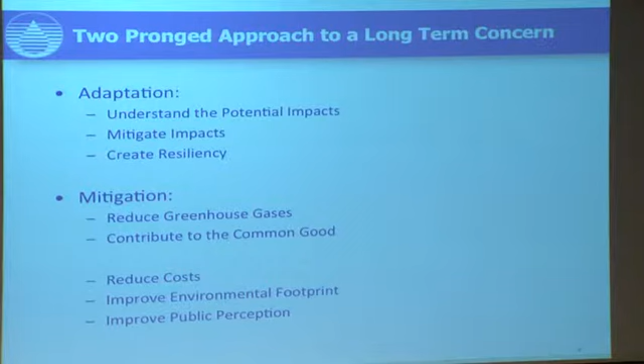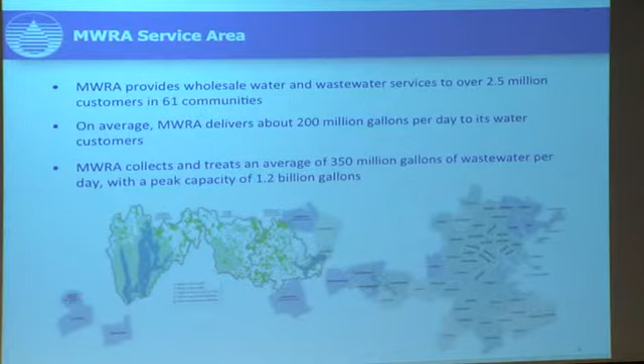We are the regional wholesaler. We provide water and sewer services to 61 cities in the Boston region, about 200 million gallons per day of drinking water supply. Before I proceed, I'll mention that in 1980 we used 340 million gallons a day, and some of the lessons we're trying to apply now to climate change and our efficiency of energy use come out of our success at reducing water use down to substantially below our reliable yield. On the wastewater side, we have one of the largest wastewater plants in the country, processing up to 1.2 billion gallons per day on a rainy day, perhaps like this morning, when our flows jumped up quite substantially while I was getting out of bed.

You always need to know what your mission is in order to know where you're proceeding, what you're doing. You can use a lot of words, or you can boil it down: drink with confidence - I think John Sullivan kind of framed that earlier - and flush with pride. If we're going to have a clean harbor, we want people to realize they're connected to that harbor. Those are both nice three-word slogans. Being an agency that's spent about $7 billion in the last 28 years, I like to add 'all accomplished affordably,' in order for us to retain our independence and ability to do these good things. Our customers need to be comfortable that they can afford our services. As we think about climate change, our customers expect to be able to drink with confidence and flush with pride under all circumstances. It's not just a good sunny day situation.

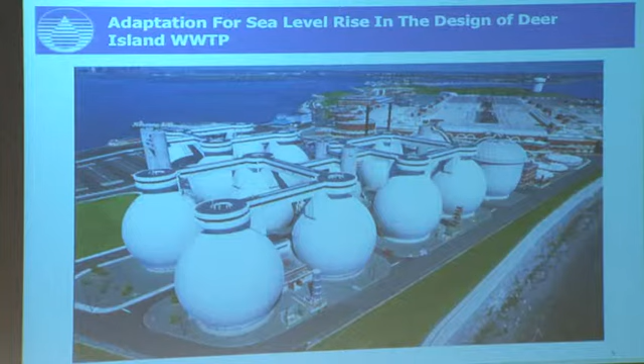So let me start with Deer Island. Deer Island's the largest plant, one of the largest plants in the country, and it's one of the few places where we've actually done anything nationwide concrete. When this plant was being designed in the late 1980s, the engineers, in almost a guerrilla action, looked at sea level rise. They looked out 50 years from 1989 with the best available science and added to Deer Island an assumption that sea level could rise almost 2 feet. Might not be what we would pick today, but it was a pretty good number back then.

And they did a bunch of things. Physically, the island is armored to assume storm surge and that sea level rise. The island assumes that the grid will go down, that our partners, as New York experienced, in electrical generation will lose their ability to deliver power to us. We can be freestanding for an extended period. Our principal headworks supplying the south of the system is also similarly armored. So the facility itself is adapted to climate change.

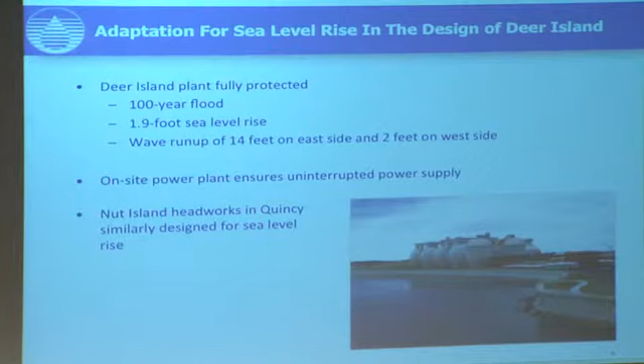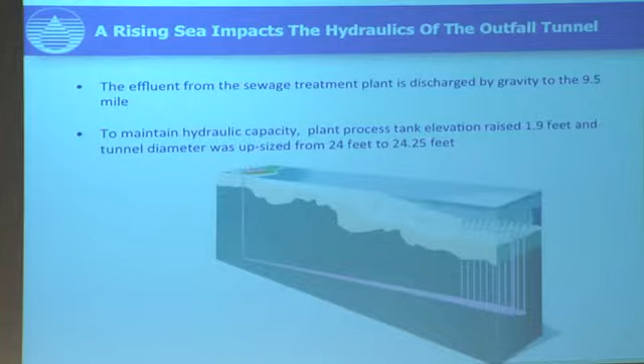More interestingly, and more importantly, and really where they got started on it, is that hydraulically we have the capacity going forward. If you think about how almost anything in the water and sewer industry works, it's elevation differences. The plant's here, sea level's here - the difference between those two things is what allows us to take the wastewater from the plant and move it 9 miles out the outfall to discharge way into Mass Bay. If sea level rises, the capacity of the outfall gets smaller.

If the capacity of the outfall is smaller, the capacity of the plant is smaller, and it rains, we're discharging untreated wastewater closer to where people live. That's not our mission. Our mission is to take it away, treat it, and put it out in the harbor. So the plant was raised hydraulically, almost 2 feet, and the outfall was built slightly larger. So the plant, the biggest single piece of our infrastructure, was adapted to climate change before it was even constructed. That's great.

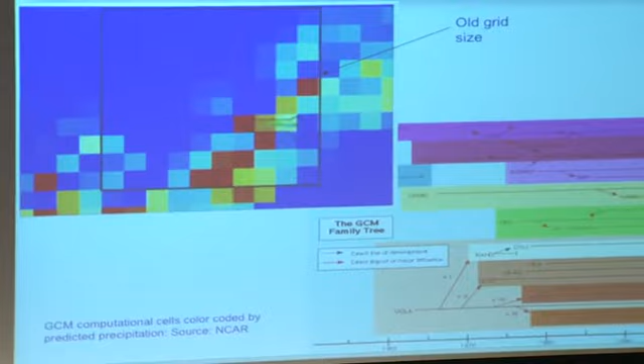Physical, something done. What else have we looked at? We've been thinking about this for almost that amount of time in the rest of the system, and I like to show this because it shows how long we've been at it and how the science has changed. When I first started looking at climate change for the water system in the early 1990s, I could get a single precipitation data point and a single temperature data point per year for that grid cell.

Now, there's Massachusetts. This is the Canadian Maritimes. I think Washington, D.C. is down here somewhere. We know that those places are not alike. Now we can get data broken down into many smaller grid cells, and in fact out by Worcester, where our reservoirs are and where it rains and snows differently, it has a different value than here in Boston. So we're able to do that.

We're also able to look at multiple models and get some sort of statistical view of how the weather might change in the future. So now we have weekly data at that kind of scale and are able to use that. So what does it give us?

So John Sullivan mentioned that we've got gravity to move the wastewater in the metropolitan area. I'm here to say that not only will gravity move it, but as climate changes, we've realized that the foresight of the folks who designed our system—very large reservoirs compared to their yield—means that although we'll see much more variability in precipitation, wetter wets, drier dries, we can capture that increased precipitation. We expect to see not a degradation in our ability to supply water, but a slight increase.

That's great, because many of our neighbors, Cambridge and others included, are likely to suffer from those drier dries and come to rely on us more heavily periodically, and we need to build that into our long-term planning estimates.

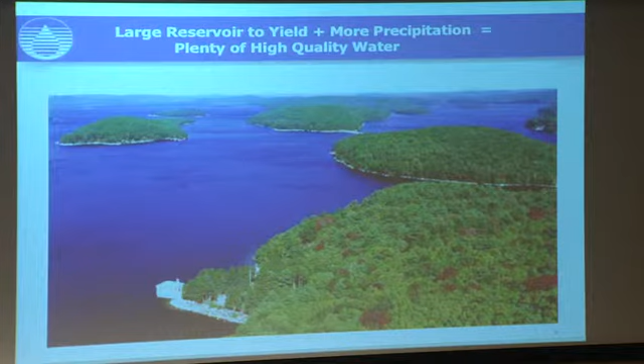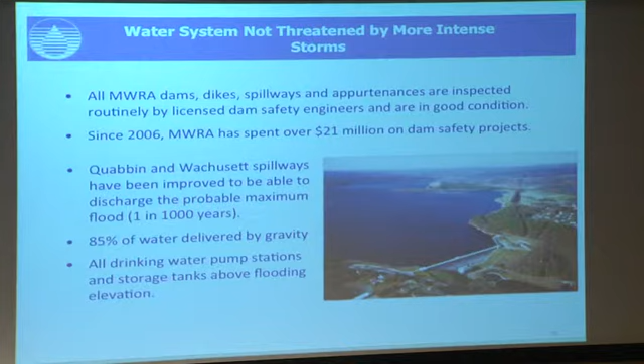That's the supply. It's nice to know that the reservoirs will stay standing. The worst case analysis for a water supply person is that your dams go away in a major storm. We've put a fair amount of investment into that, looking not just at what the current version of dam safety would look at, but thinking about climate change, and we've really convinced ourselves that we're in pretty good shape with the investment of a fairly substantial amount of money in the recent past.

One of the things we've tried to do as we've looked at investments for climate change is make sure we're getting the maximum benefit in day-to-day flexibility and resiliency. It's nice to know that an investment in something like dam safety is great for something that might happen 20, 40, or 50 years from now, or might have a probability of one in 1000 years. It's even better to know that it makes it easier to operate that facility today.

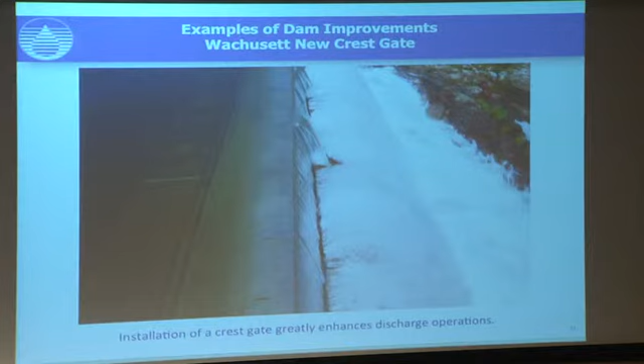So we're thinking in each one of our investments, what can we do to get benefit today as well as benefit long term? In this case, by adding more flexibility to the way the dam operates—a gate at the top which we can lower and raise—we can now operate the reservoir for environmental benefit, flood control benefit, and water supply reliability in ways the original designers had not planned for. Great investment: long-term vision with short-term benefit as well.

So let's switch a little bit to the metropolitan Boston area. Let's switch a little bit to coastal stuff.

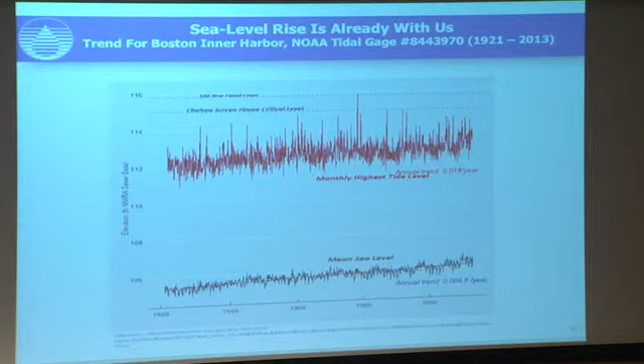We all know, you've all seen 6 or 7 versions of this stolen from somebody else's presentation. Sea level is rising, we've seen it. Big storms, Sandy, got our attention. So a great crisis for many folks in the Mid-Atlantic states. My family's from New Jersey, several weeks without power. My son was in Hoboken, got to sit on the top of the hill and see everything flooded.

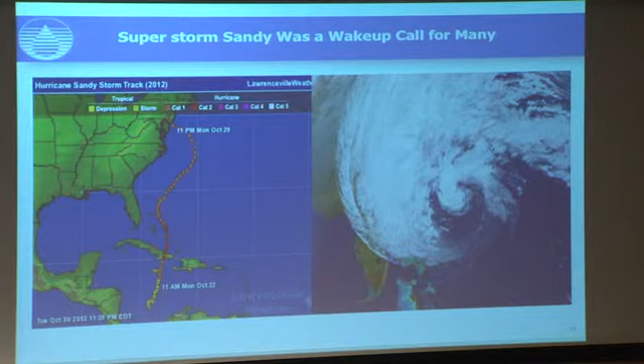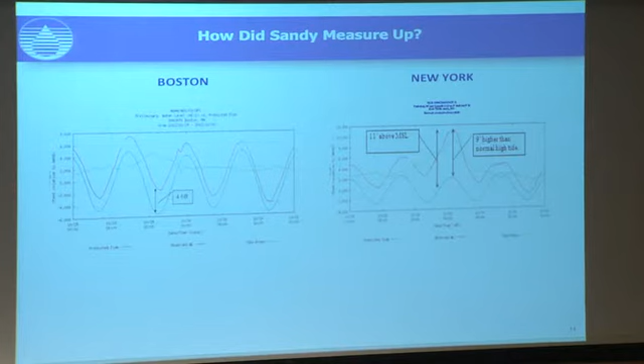But for us up here in New England, the storm offered a couple of good lessons. There's the famous data from New York, multiple tide cycles. Here in Boston, when we look at the data, what I draw from it is 4 or 5 hours later, and this storm would have been worse than the storm of 1978. We would have seen substantial damage. So it got our attention. I like to say my attention is already captured.

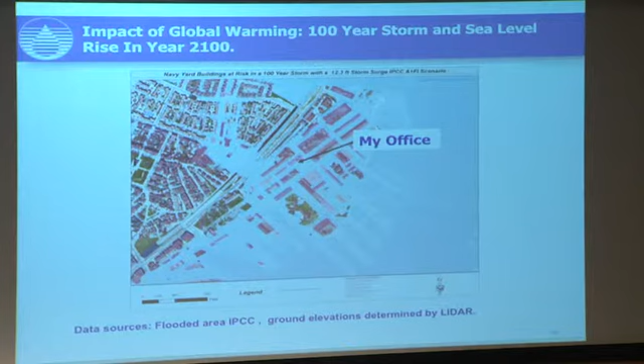In Charlestown Navy Yard, just around the corner from here, sea level rise will make it a little difficult to get to the office, at least by normal transportation modes. So what are we doing about that?

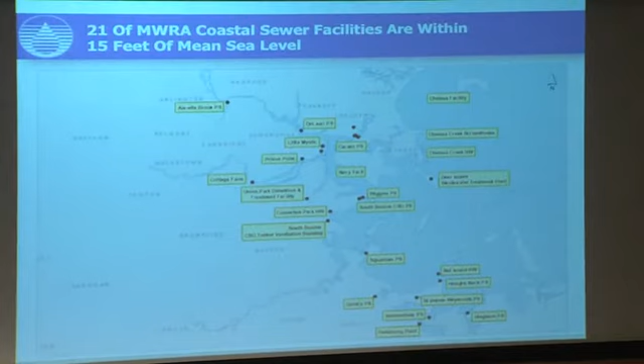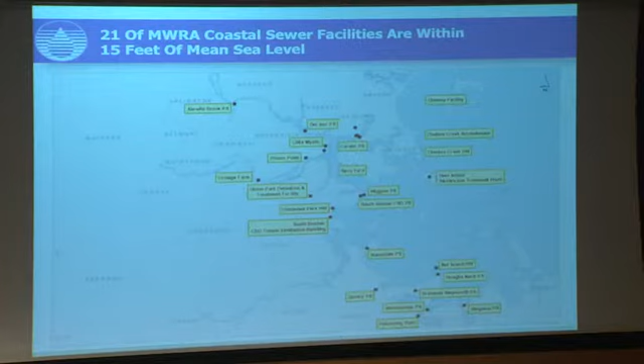We started thinking about the Boston area and realized the great wonder of gravity is that everything flows downhill and ends up on the coast. So wastewater from the entire metropolitan area is trying to get to Deer Island, and it ends up at facilities along the coastline. 21 of my critical wastewater facilities sit pretty close to the water's edge in tidal areas. So we've concentrated in the last couple of years looking at those things.

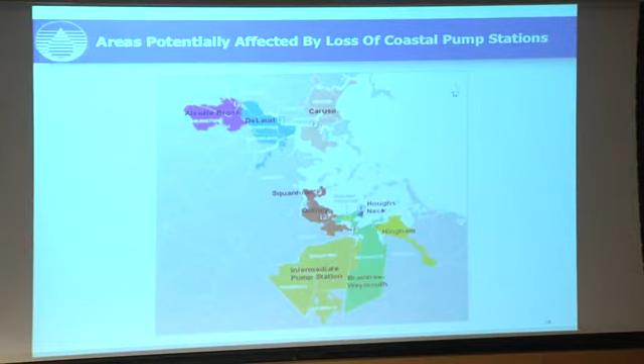Here's some pictures - my boss likes pictures. Some maps - he also likes maps. These are areas where if some of those facilities went out, we'd be immediately in danger of having wastewater backing up. If it went a little longer, we'd see wastewater backing up into all the coastal waters and into areas in the center city. So, big deal.

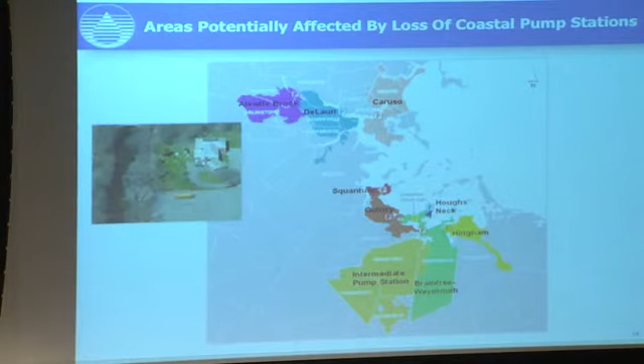Pictures of facilities again. So what did we do? We looked at New York and said to our board, we don't want to do some of the things that happened. Now what happened in New York, some of it was great. Water facilities, Long Island, a lot of folks out of power - I think the number was 90% of the folks. No power. If your emergency generators don't work, or don't work long enough, you're very quickly out of water infrastructure. Something we paid attention to.

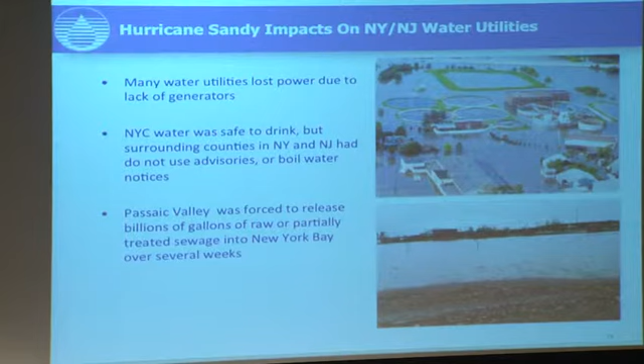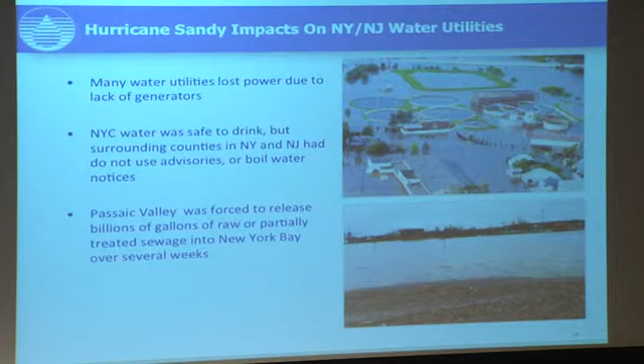New York City, gravity, good system, great stuff - the water was flowing. Passaic Valley across the water in New Jersey went for quite a long time, many weeks into months, discharging relatively untreated wastewater into the bay. That's not acceptable from our board of directors' perspective. It's not acceptable from the city of Boston's perspective, having relied on the Clean Harbor to put all that investment in place. So we don't want to be there.

So we picked some benchmarks. I think John Sullivan said no design criteria - this is the only picture with design criteria. I took a fresh look.

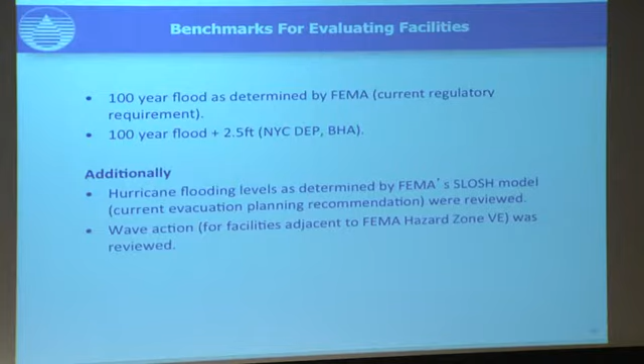Our team took a fresh look at the 100-year floodplain. Interesting to find out that, in fact, maybe we should have been paying closer attention to those maps in the recent past. And then we picked a number - just like everyone else, you got to pick a number. Your engineers want something. We picked 2.5 feet. A number of organizations in the area have used that as a reasonable number. It's a wrong number - all numbers are wrong, but it's a good number to start with. And we also looked at some of the hurricane modeling to see how the slosh model might affect some of our facilities. And where we're very close to the water's edge, we looked at wave action as well.

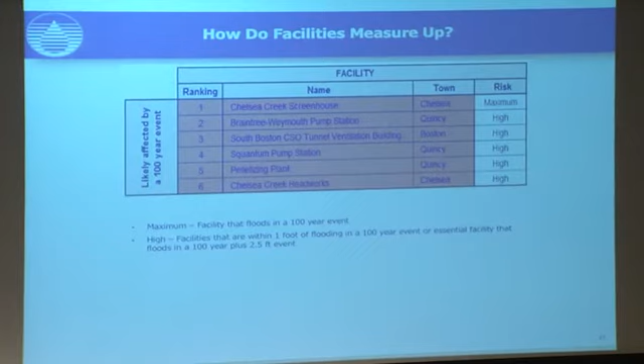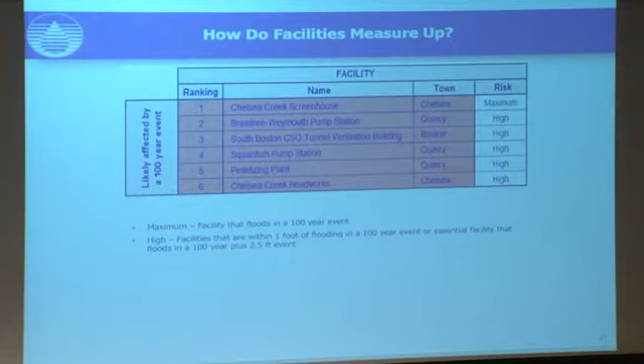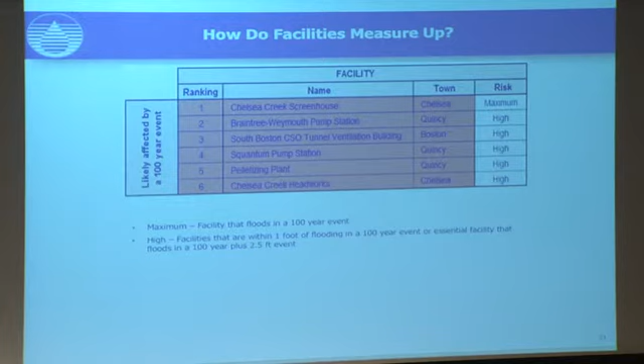So I'll flash through a couple of pictures of facilities, a couple of lists here. Six of my facilities are close enough to the 100-year floodplain that I should worry about them. And why do I worry about them? Because that's a made-up number - 2 inches this way, 4 inches that way, and some of these facilities might be vulnerable. So let's look at each one. In fact, this top one here, we'll see in a minute, is actually substantially below the 100-year flood. I haven't quite figured that one out - predates me.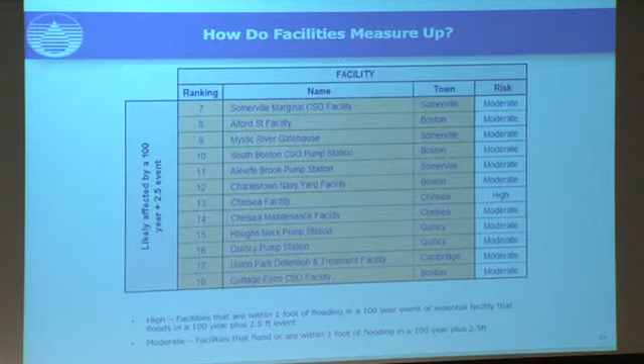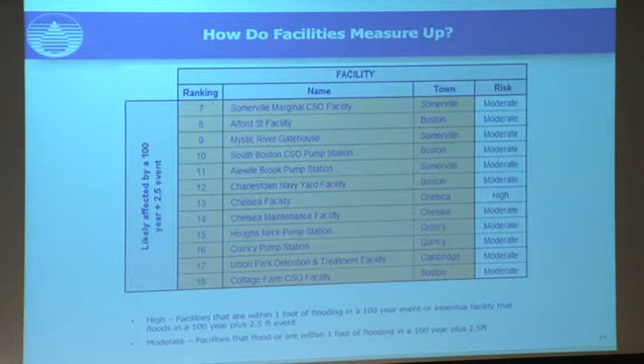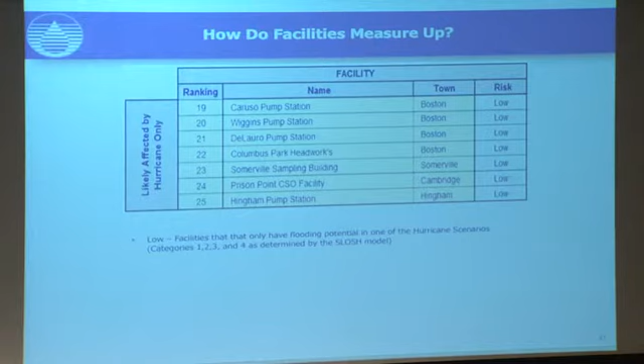18 facilities, or rather 12 facilities getting us up to 18, including 3 of my administrative facilities, when I move the benchmark to 2.5 feet above the 100-year flood, are in trouble or potentially in trouble. We need to look closely at those. Then fortunately, another 7 facilities - really only the worst case hurricanes, maybe the biggest hurricane taking that left angle hook at the right time of day - could affect these facilities. Lower priority, but need to take a look at those. And then fortunately, my 2 biggest investments, Deer Island and Nut Island, at the very bottom of the list, are well protected. So that gives our board of directors and staff a sense that at least our biggest assets are well protected, and a sense of priority to move forward.

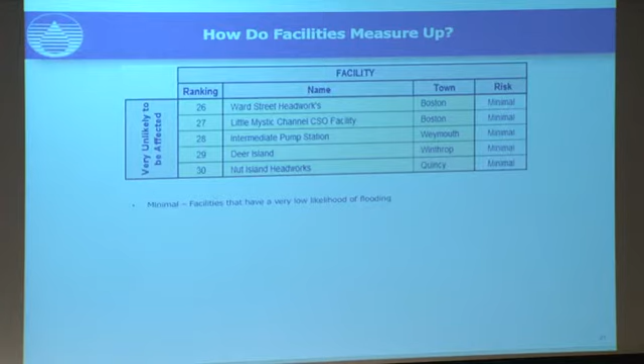So let's look at a little bit on the map again, because my boss loves maps.

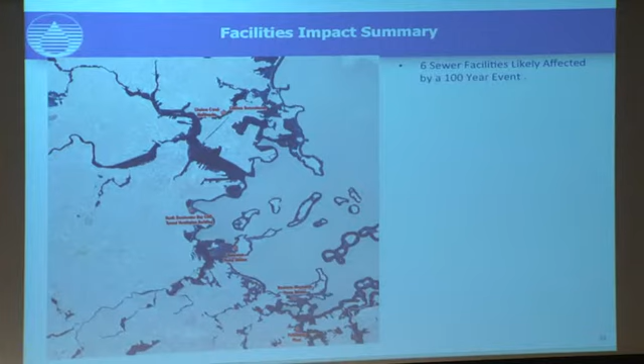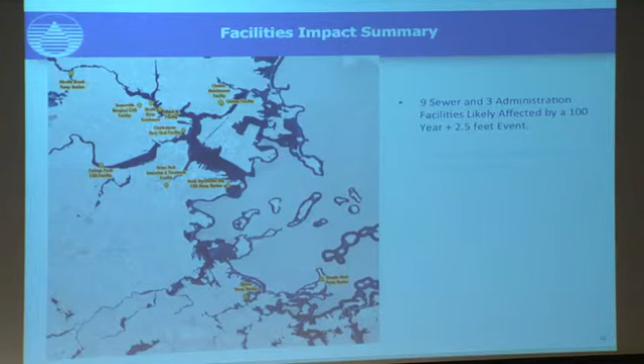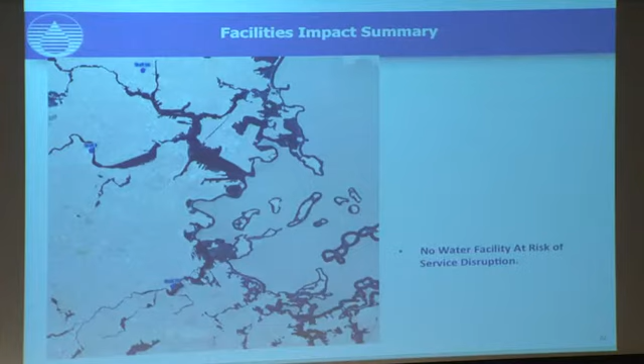The facilities that have the highest risk there, scattered a couple up in Chelsea, a bunch more in Chelsea, and then all up and down the coast that could be affected if we raise the threshold to 2.5 feet of sea level rise. Facilities unlikely to be affected except in worst case storms, facilities I'm pretty comfortable with, and then just for fun, the fact that I'm not worried about any of my Metro Boston water facilities. So what's that look like on an individual facility basis?

So we've looked at individual facilities. And New York City, by the way, has a great recovery plan if you go to their City DEP website and look at it, they have a great set of drawings on all of their facilities. We stole some ideas from them. These are great things to do.

More interesting is that, as John Sullivan showed earlier, when the streets flood, the sewers will flood. All the interesting things in this building are down deep and connected to things which are connected to the Chelsea River nearby. So we're looking closely at not just how do we protect it from the outside, but how do we protect it from the inside, from water that wants to normally be flowing through the facility, but in a storm might want to fill up from inside.

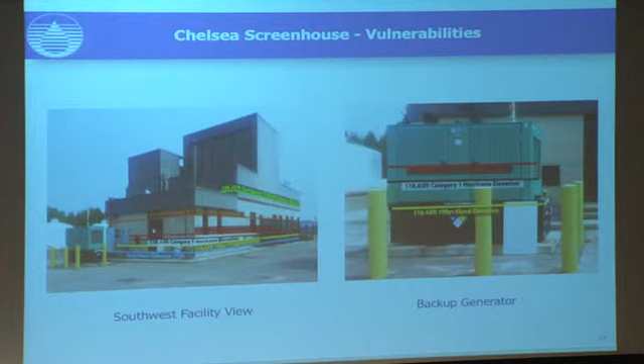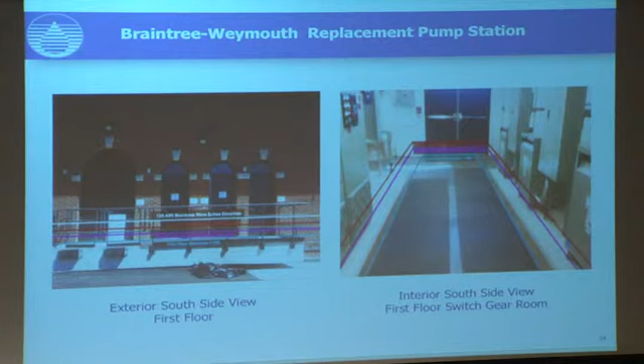So let's switch to a facility that's in a little better case, a little bit newer facility. This is the Braintree-Weymouth pump station serving some of our suburban customers. And again, in this case, you don't see a yellow line because it's well above the 100-year floodplain. Blue's the door threshold, and red is the 2.5 feet above the 100-year flood. So outside, we'd have to armor this. But inside, if we don't armor it, there's all this electrical equipment that's in danger. So I'll come back and talk about that in a minute as we think about what we could do.

And then, just because everybody likes animations, I'm going to show this one quickly. Here we are. My Chelsea headquarters, where 500 of our staff are located and work out of every day. Our Chelsea maintenance facility, where all of our maintenance people and all of our spare parts are stored. And then the facility we just looked at, the Chelsea Headworks, and a Screenhouse nearby.

Here we go, flooding coming up. You can see the ticker here, they'll turn red as they flood. Interesting, this is a good thing to do. Long before our facilities over here get flooded, I can't get there. So it really doesn't do me any good that the designers design those facilities to be above the floodplain, because it doesn't matter that all my equipment is in here, it's not going anywhere. So I need to think about that.

And then worse yet, of course, if you let it flood a little deeper now, going into sea level rise, we eventually end up with all those facilities being interior flooded. So not so good.

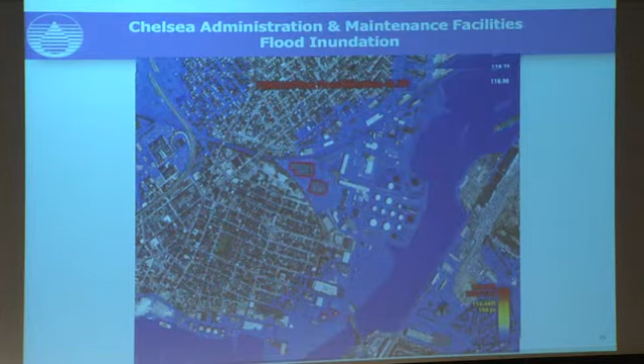Couple of quick shots. You can see one of the fun things about engineers - you give them a benchmark and they do a good job.

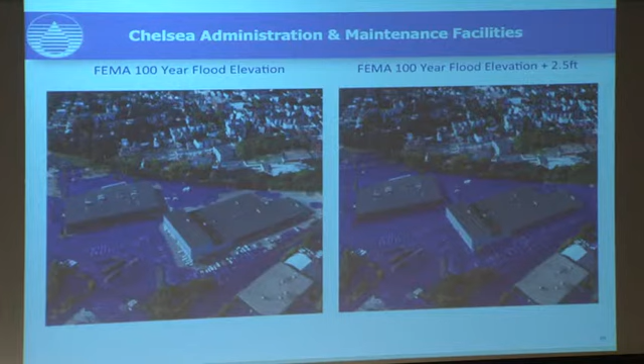This facility, all the way around the building, sits on an island at the 100-year flood level. The parking lot's full, but the building is safe. But if you go 2.5 feet above that, it's flooded. A couple different angles, you can see all the way around. We looked at these to figure out where all the penetrations are that could get water into the building.

So what do we do about that? Currently, we're a water and wastewater agency, and we think about rain all the time. Everybody in the organization's got a weather app on their phone - I get like 25 emails a week from the weather service. This morning I got emails saying, oh my God, it's gonna rain. We think about weather. So what do we do now?

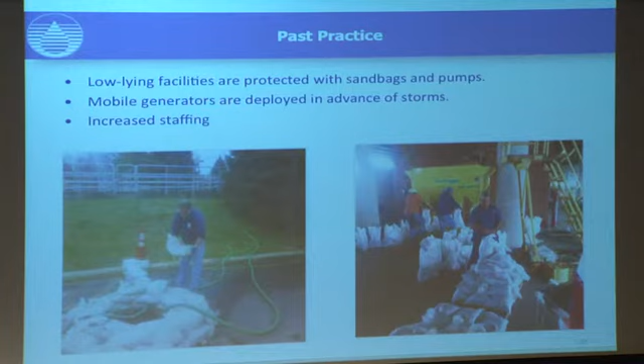Normally, anytime there's significant rain, we're out there, our staff working. Facilities are sandbagged. If we don't have a built-in generator, mobile generators are brought in. Places like Deer Island, which might be cut off, staff are brought in - electricians and mechanics on duty - so if the island's cut off because the causeway is flooded, they're already on site. We bring emergency power up. We're ready to do this. That's what we do every time there's a big storm now.

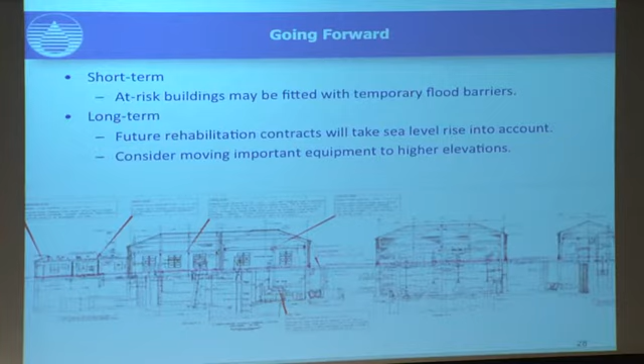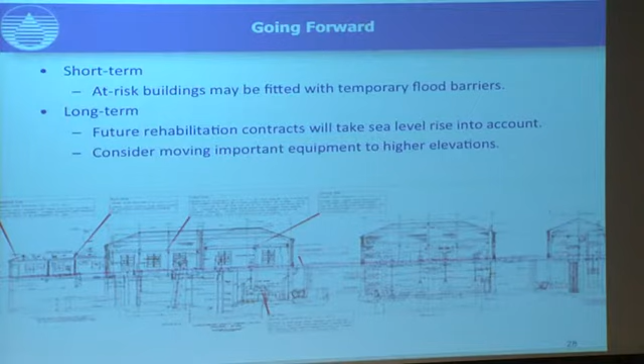Probably not good enough. So what are we looking at? You saw some of those critical facilities - short term, each one now has a plan for short-term armoring. Where do we sandbag it today to do a better job? Interestingly, a systematic look: my boss, the director of operations, and I argued about which ones were highest risk. I said, well, I've got the maps - this one's worse than that. He would have sent the crews to the wrong place because he had a perception it was higher risk. Analysis helps with that. So now we know where to send the crews first, where to send them second, and we've got plans in place to deal with those.

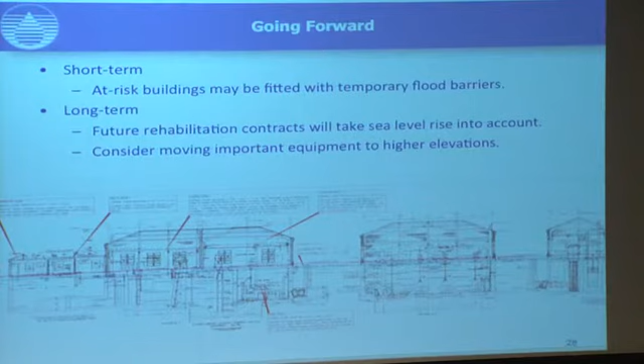Longer term, what do we do? We need to look at each facility. We've got maintenance stuff lined up now to do short-term armoring - gates in front of doors, maybe more secure windows on certain facilities - plus additional plans. Longer term, we're looking at each individual facility as it comes up for rehabilitation. Pragmatic approach: every single one of these facilities with moving parts gets renovated on a cycle of something like 20 to 25 years. They don't last long handling wastewater - there's a lot of wear and tear, you're in there regularly. So what we're doing is looking at that cycle and asking, is it a high-risk facility? When will it next be renovated? Is that an appropriate time to spend money on it?

We have 3 facilities which were already in rehab contracts a year ago. All 3 of those have had the design contracts amended, and the benchmark has been raised 2.5 feet for the designers to look at. For outside facilities, we're looking at a variety of things.

We're not buying these, but they're really cool - they're called tiger dams. You fill them up with water, and you can easily build a barrier around something. My view is they're bright orange, and you'd fill them periodically when it doesn't rain. Our facility in Chelsea is immediately under the flight path for traffic helicopters, and I don't want to have those out on a sunny day. So if we do something to armor that facility, it's not going to be bright orange like that - it'll be a little more subtle, because you only get one or two chances to get it wrong before you're never allowed to do it again.

This is a facility down in Quincy. We don't own it - it's our next door neighbor. This door here has provision for stop logs on either side, and that's a submarine door, sealed. These folks have an expensive robotics facility there and they don't want the storm to come in.

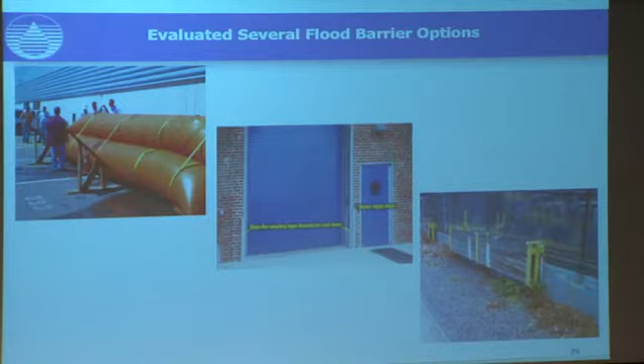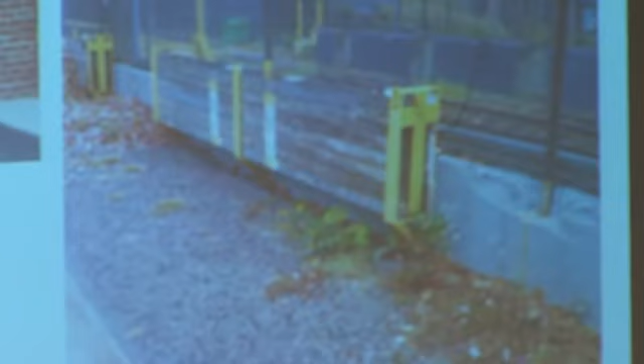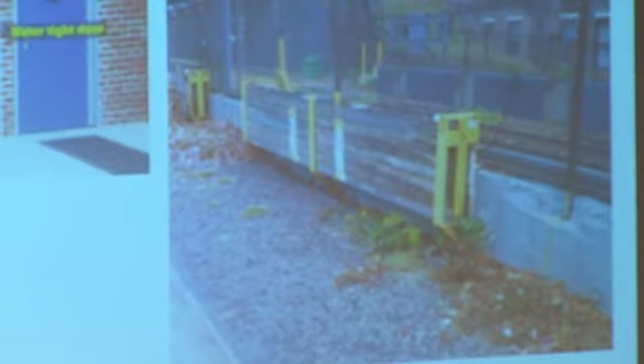This, for those of you who are Boston area residents, is the Fenway T-stop. Who remembers 1996 and the Kenmore Station? Who knows how much it would have cost to have avoided $85 million and 2 months worth of service disruption? About that much - that's about maybe $500 worth of lumber, which should have been there. It was designed originally when the portal was first built, but had been taken away, and no one in operations knew they were supposed to deal with it. Now there are these nice bright yellow things, all padlocked. And I hope - is there anybody from the T here?

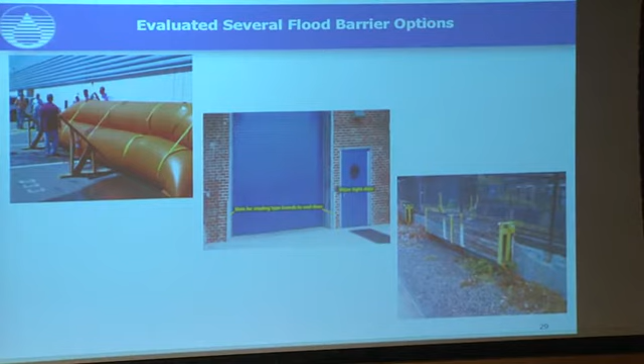I hope that they're out there on a regular basis practicing. But that would have saved $85 million—simple lesson. So we're looking at things like that for all of our facilities.

Here's a facility that doesn't read real well, at least from my angle, but we're looking at this facility. What can we move from downstairs to upstairs? Where can we move the electrical panels so they're above the flood? Can we split a pump so the electrical part is upstairs and the mechanical part is downstairs? Are there parts that we can sacrifice?

In this facility, it'd be very difficult to move the dry weather pumps out of the downstairs, an enormous expense. But we've looked at it and said, well, we could sacrifice those. We can use the wet weather pumps—very inefficient—but we could use them during normal operation until we replace the dry weather pumps. So that's the decision we're going to make.

With the emergency generator, we can raise it, I think they said like 19 inches inside the building envelope, so they're going to do that. Maybe at some future date when the roof is being dealt with, they'll raise it again, but we're not going to replace the roof over it. So in each case, we're looking at the benchmark and being pragmatic about what sort of protection we're putting in place.

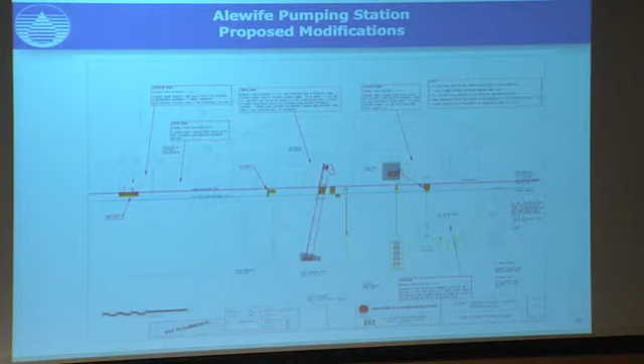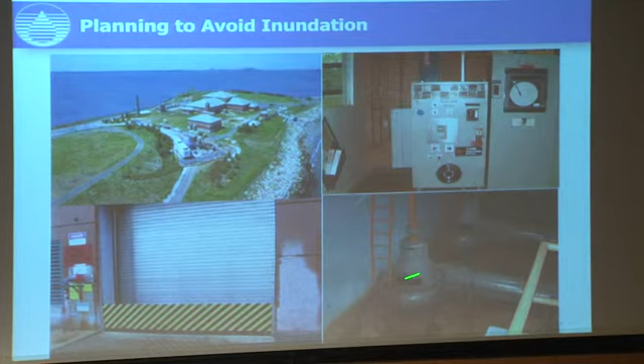A couple of other examples. Here's some good news—this picture from New York City shows a flap gate in front of a garage door, protecting that garage door. Here's a case where the mechanical equipment in one of our facilities is downstairs, electrical equipment upstairs, and on Nut Island the armoring around it protects it.

Think about inundation, plan for it. What else do you need to do? You need to think about access. I showed you the Chelsea facility with the loss of access. So we're actually working on this.

In fact, tomorrow we're doing our first drill on evacuating that facility. We've got 300 vehicles, we've got 500 staff there. We're not moving them all, but we're moving some of them, and each unit is moving a few of their vehicles to their designated safe high ground area where they would be stationed in a major flood.

And we've recently—we have our operations center where all the computer equipment is that operates the whole metropolitan Boston sewer system and water system—we actually have moved, created a second facility out in Marlborough, well upland, far away from the coast. It's in the room adjacent to this. This is actually the treatment plant operations center.

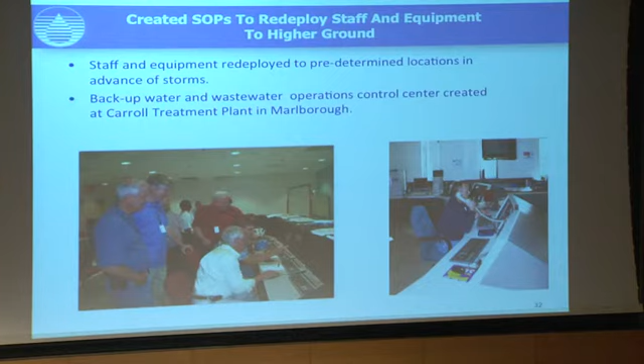And most importantly, once a month, folks have to drive out there and practice. Why? Because you need to know that they know where it is, and you need to know that they know how to make the transition from one to the other. You don't want to do that in a crisis. You want to do it in practice. You need to practice if you're going to perform well in a crisis.

What does this say? This says basically that we're using our normal master planning process. We do not have a straightforward, single-purpose climate change adaptation plan that freestands. It's built into our normal master planning. We have lots of low probability, high consequence events that we deal with, lots of opportunities to add resiliency as part of the master planning process. And that's how we're doing it.

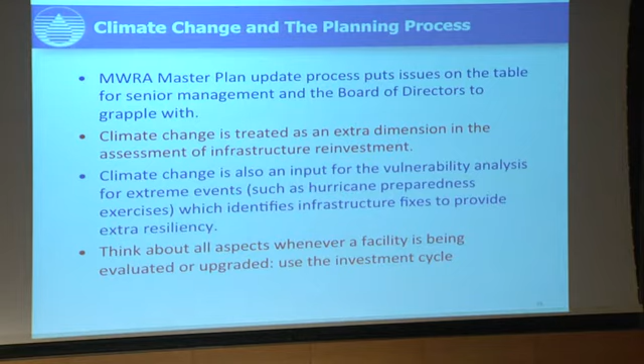How am I doing on time? A minute or two—I'm going to just show one slide here.

We're paying a lot of attention to renewable energy, and then I'll stop there. About half of the total energy need at Deer Island comes from renewable energy, the equivalent of about 5,000 barrels of diesel fuel for heating. About 25% of our electrical demand is met on island with renewable. Half the power we use to run our water treatment plant out in Marlborough comes from renewable, and we are doing a wide variety of things around the service area, both to increase efficiency and to add renewable power.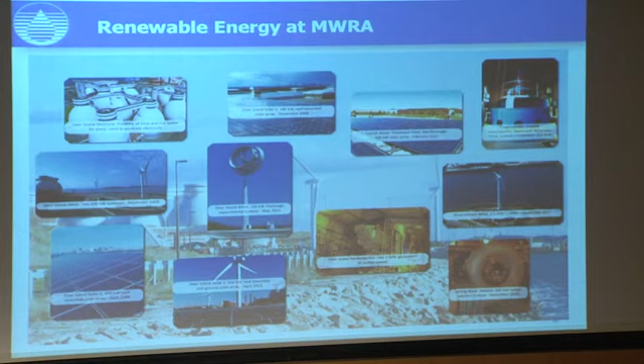It's great to adapt, but you also need to be part of the mitigation for the problem, so that those projections that lots of folks showed for 2100, that have a lot of variability, that we get the low end of that variability. So with that, thank you.

Thank you very much, Stephen. You can let Fred know, if he doesn't already, that he's got the right guy in charge.